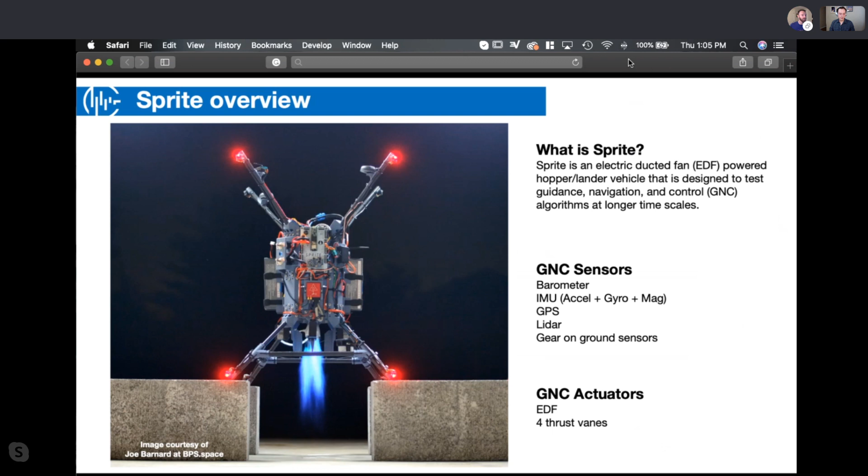And then there's sort of two main actuators. There's the EDF itself, which is the main fan in the center that's producing most of the thrust. And then there's 4 thrust vanes, which give you control over the roll, pitch, and yaw torques.

So I took this video from something you sent out on Twitter, which I think is pretty awesome, just to show what this is. There's the big fan, the EDF in the center. It's generating this column of air, producing all of that thrust, and then you are commanding these 4 thrust vanes in very specific ways in order to generate roll, pitch, and yaw torques.

Is there anything you want to add to this before we move on? The only thing would be the vane design is different now, but the concept is still the same. The two main actuators are just the fan—how fast are we spinning, how much force does it generate—and then the torques on the vehicle that can control all 3 axes, roll, pitch, and yaw, and that's just from those 4 vane directors at the bottom. So yeah, that's about it.

Okay, so going forward when we're talking about our control inputs, we're going to be talking specifically about these TVC vane positions. All right, let's move on here.

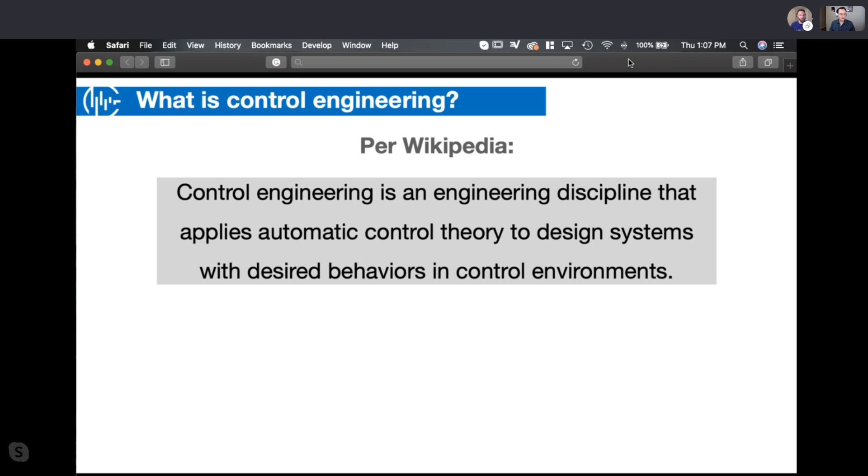So we're going to start at a really high level, and then hopefully hone in on something more specific. If you go to Wikipedia and ask what's control engineering, it says control engineering is an engineering discipline that applies automatic control theory to design systems with desired behaviors in control environments, which is just a mess of a sentence.

So the TLDR is that we're trying to get things to behave the way that we want them to behave. In most cases, we're talking about electromechanical systems—things like Sprite, like your car that you're trying to design a control system for, or a spacecraft, or your phone, or whatever. It's some combination of electronics and mechanisms and things like that.

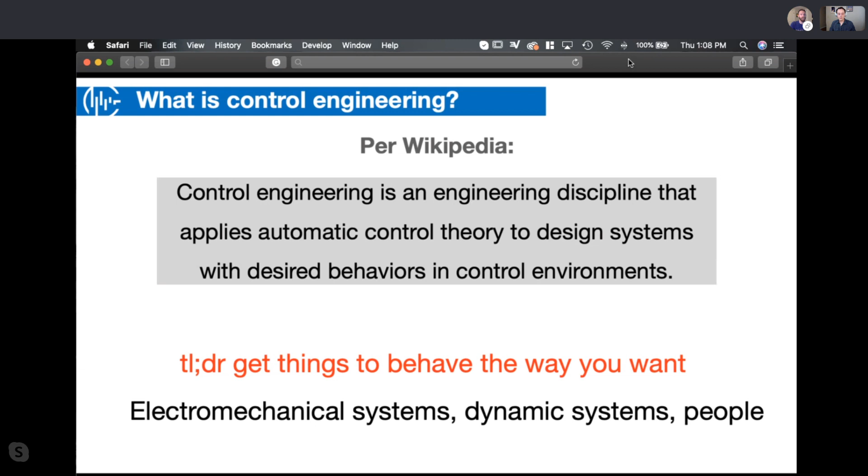But really, we can apply the theory we learn for controlling those types of systems to any kind of system that's governed by dynamic equations—dynamic systems like large-scale weather patterns, or even like you could adjust the interest rate to adjust the economy and inflation and stuff like that. Things that are just governed by these dynamic equations. And if you wanted to really stretch this analogy, you could talk about getting people to do what you want as a control problem, and we'll get into that in just a second here.

So the thing that all of those have in common, whether you're trying to control a dynamic system, an electromechanical system, or people, is that there's these 3 questions you're trying to ask throughout this process. The first is just trying to figure out what the current state of your system is—what's happening right now, what's the situation. What is Sprite doing? Is it hovering? Is it rolling? Is it tilted off to the side? Figuring that out. And then once you know that, you have to ask yourself, well, what do you want the state to be? What's the end goal, and what's a good outcome? Do I want Sprite to be in that state, or do I want it to be a little bit higher or a little bit straighter or something?

And then the third question is: okay, I know where it's at and I know where I want it to be. What's necessary to accomplish that goal? How do I get to the end goal? How do I poke and prod the system in very specific ways to make the state what I want it to be? So if you talk about controlling people, suppose you're in an argument with somebody, and you think, well, what do they believe? What do I want them to believe? And then how can I structure my arguments in a way that's going to change their mind? We can think about things like that in terms of controls.

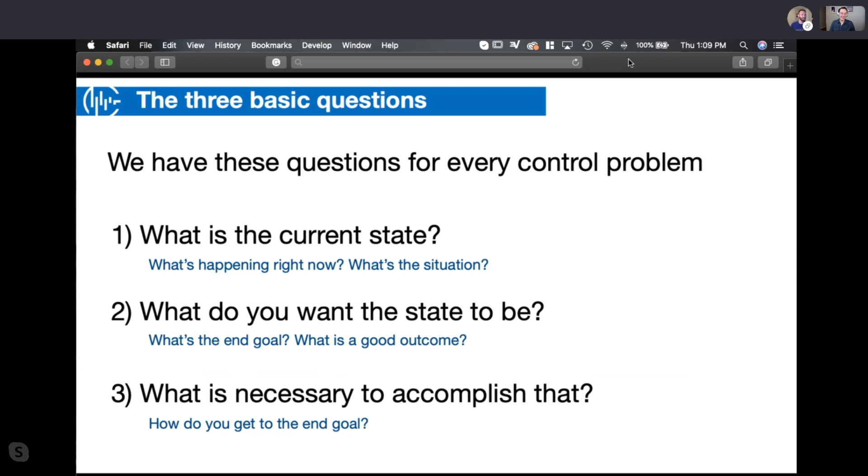This third question, by the way, is what I consider sort of the crux of the control problem, which is figuring out how to accomplish it.

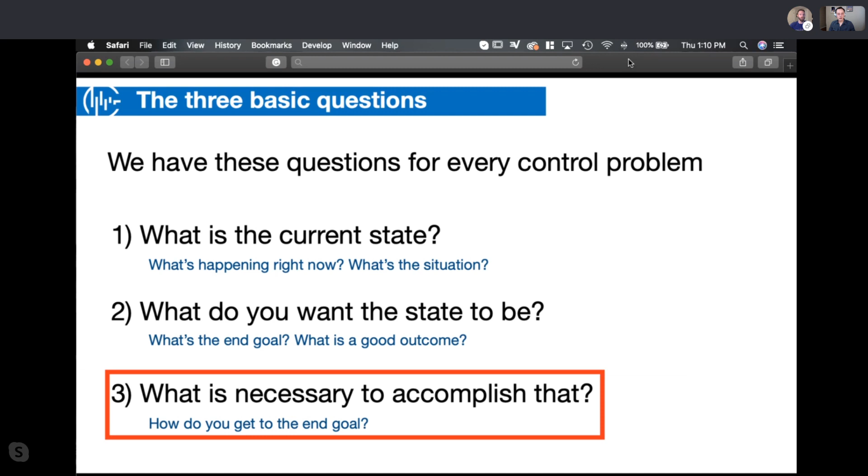We tend to think of autonomy as the very first thing, right? We want to get humans out of the loop. We want to build robots and drones and autonomous cars. And that's a perfectly legitimate reason to build a control system. But sometimes we do it to improve performance, like power steering assist on vehicles. That's not getting the human out of the loop, that's just improving their ability to steer the car.

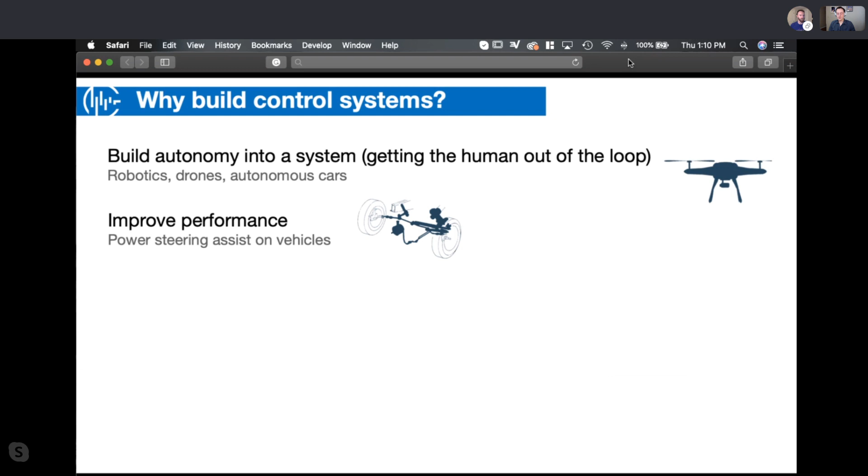We may do it to improve safety, improve stability. Some processes are inherently unstable, like nuclear power plants, and in order to get anything of value out of them, we have to build a control system around it to make them useful. And sometimes we're just doing it to reject disturbances, like a 3-axis camera gimbal, for example. These aren't all mutually exclusive, they're all interrelated. But it's one of the reasons why almost everything you interact with from a mechanical or electrical standpoint has some sort of control system involved in it, usually one of these 5 reasons.

So we're going to step back now. We understand the goal of control, so let's go all the way back to the beginning with an incomplete history lesson. I also want to preface that I'm not a historian, so the history might be a little bit fuzzy here, just take it with a grain of salt. The important thing is the story and the evolution of how we think about these problems.

A long time ago, the Greeks, specifically Ctesibius, developed what is regarded as the very first documented negative feedback controller. They were trying to figure out how to tell time with water clocks more accurately, and he came up with the float regulator, which is what we have in all of our toilets now for the most part. The simple concept is that if the water level in the tank is too low, the float goes down, water supply increases, raises it back up. Eventually you get to some perfect water level where the amount of water being supplied into the tank matches the water leaving the tank, and you now have a steady flow rate out of the bottom, which you can use to act as a timer. It's like a natural regulator.

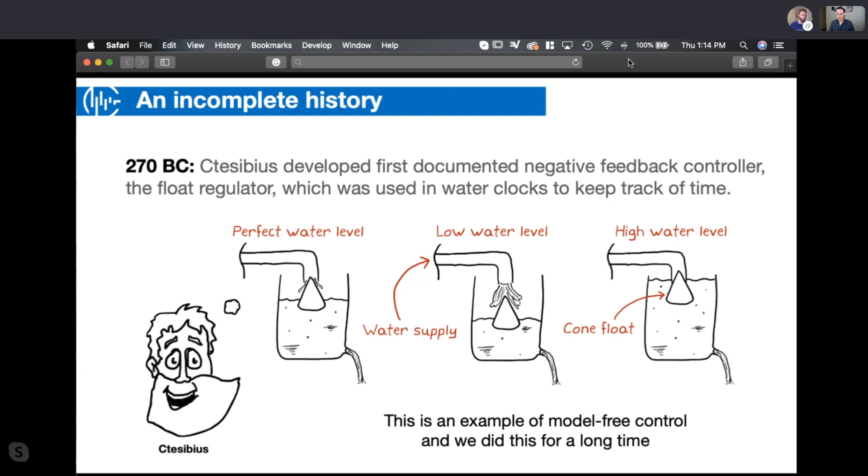So that's an example of model-free control. We have a choice now. Ctesibius didn't have that choice, not because he was lazy or anything, it's just the math hadn't been invented yet.

So we jump forward a number of years, and mathematics and calculus start taking off with Newton and Leibniz. They independently develop calculus, and then a whole bunch of people, including them, come along, like D'Alembert, Euler, Bernoulli, Lagrange, Fourier and others, and they start applying these differential equations that calculus gives us to dynamic systems, to help us predict how they're going to change over time.

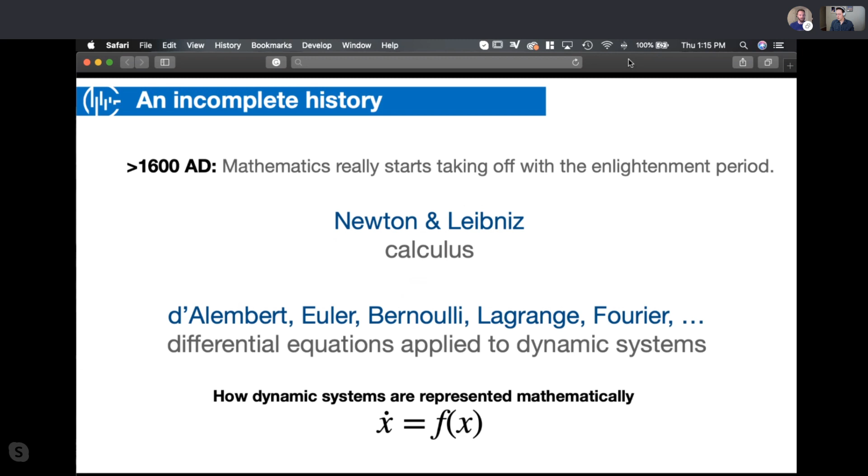And they loosely take the form of this equation, x dot equals f of x. The way we can interpret this is that if we have the current state of the system, which is x, and that could be a vector of things like position, velocity, roll angle, temperature, voltage, anything that helps describe the state of the system, it goes into what we call the state vector.

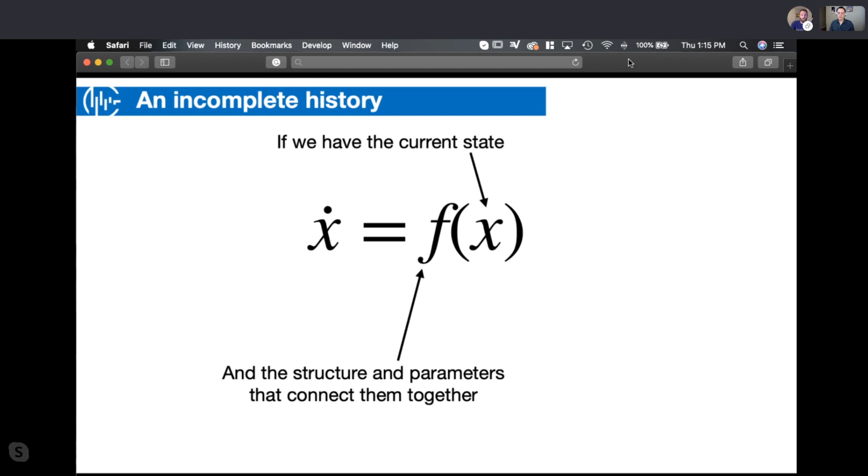So if we have the current state, and this is a big one, we know the structure and the parameters that connect all those states together, that function, then we can predict how the state's going to change over time. This x dot is the first derivative of x with respect to time, so it's how that state is changing as a function of the state itself. That's the baseline of dynamics right there.

But that would only be so good. We don't want to just wind up a spring system, let it go, walk away, and ask how's this thing going to react - which is all x dot equals f of x allows us to do. We also want to be able to add what I'm calling intentional external inputs into the system. We want to change the state of the system by adding energy into very specific points, which we'll call U from now on.

Unfortunately, U aren't the only external inputs that get into your system. There's also unintentional external inputs that we'll call disturbances. For Sprite, that would be wind gusts, temperature variations, and all the things that move the system that you haven't intentionally added yourself, like adjusting the EDF fan or the thrust vanes.

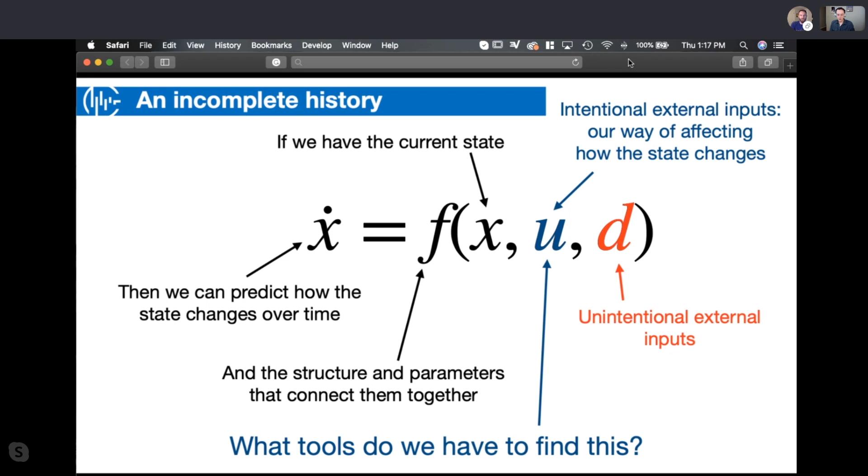So the question is, what tools do we have to figure out what U needs to be? We'll get to that in just a second, because I added this in since there were a few questions on the Discord. So this is kind of a rough chart.

What I wanted to show you here is that x dot equals f of x, u, d is like an abstracted version of what this model means. It's just some random function of x, u, and d. But there's a lot of different ways we can represent that function, and the method we choose depends on the system we're trying to model and what we're trying to do with it.

For example, we could just leave it as a differential equation, a time domain differential equation - that's a model of our system. If it's a linear system, we can break that high order differential equation up into a set of first order differential equations, which is state space representation, with the so-called A, B, C, and D matrices. These are just a different way to represent the dynamics of our system.

If it's a linear system and a single input, single output model, we could represent it as a transfer function. Same idea - we have some output, which is position, input is force, and we can write a transfer function that captures the dynamics of the system.

If we wanted to be really fancy about it, or if the dynamics are too difficult for us to write out directly, we may represent our system with a neural network and then use some form of machine learning to figure out what all the parameters need to be so that the input-output relationship matches real life - force goes in, position and velocity come out.

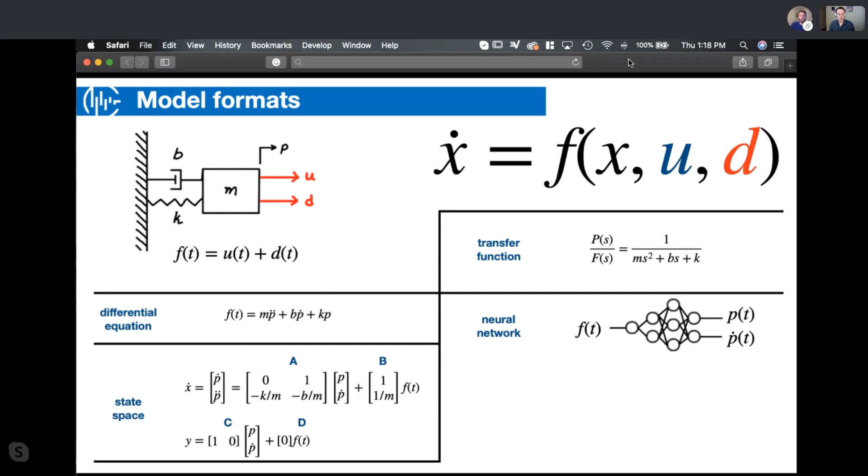And then we have a number of hybrid model formats. If our system is discrete and the transition from one discrete point to another is governed by probability, we might choose a Markov decision process to describe our system. Or a state machine, like for Sprite, you may have a model that governs how it behaves when it's on the ground, then switches to a takeoff state, then a hover state, then a land state. So all of that can be built into a model.

So the thing here is when we're talking about a model, we're not talking about state space or transfer function or hybrid. We're talking about all of this stuff. We're just talking about a mathematical representation of the system.

I just want to add real quick, especially if you don't have a background in it, all these equations and fancy italic letters can look a little scary. But it's just an attempt at mathematically representing what's going on. The neural network is, funnily enough, kind of a friendly intro to it. You're just trying to describe how the system works, and there's a bunch of different ways you can take to do that. There's seriously no one approach.

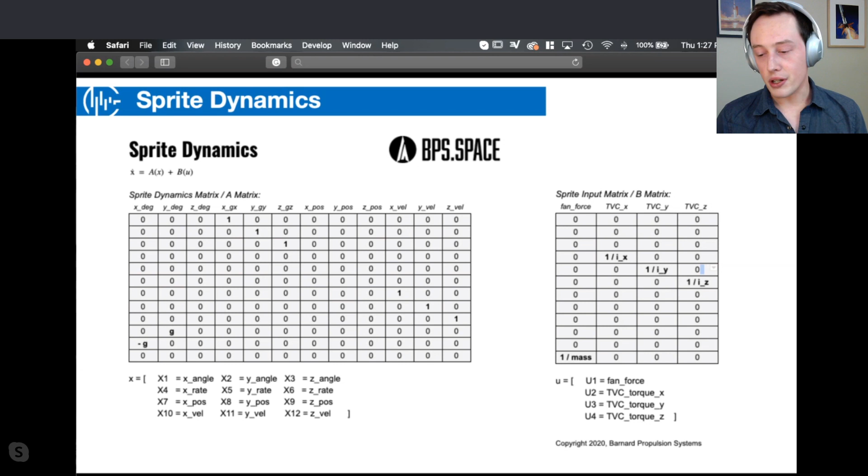That's the thing that has helped me a lot in designing Sprite, is how close it really is to a drone or a UAV. I actually got a lot of the idea for how to build these matrices from a couple different papers that went through how they had written out the state space matrices for their quadcopters. There's a decent amount of resources online that you can derive these from without having to write every single thing from the ground up, or you can just use those as a jumping off point.

So here's what's awesome, Joe is in a much better position than Ctesibius was, because he now has a model of his system. Control theory provides tools necessary to analyze dynamic systems and then determine what the right inputs need to be. That's what control theory gives us.

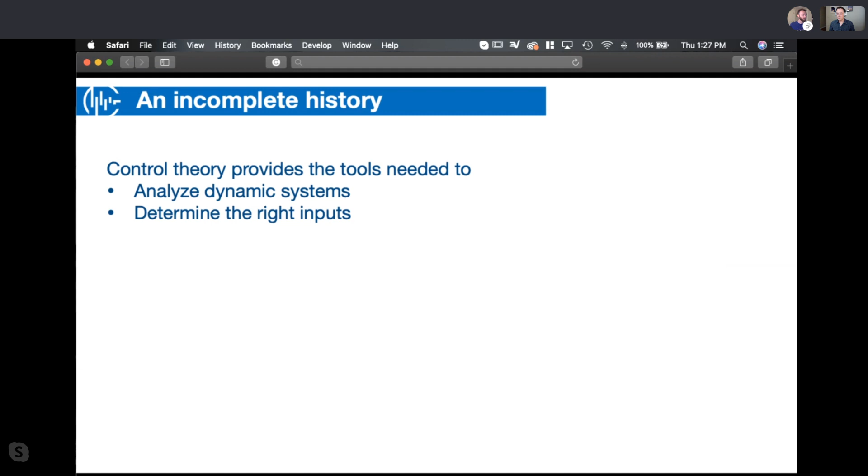It sort of deviated from mathematics in the mid-1800s with James Clerk Maxwell. He was trying to describe this instability in these flyball governors and decided that the existing mathematics wasn't good enough. So he developed some additional tools and techniques, wrote it down, and then boom, control theory has its own field. It began, and it's flourished ever since.

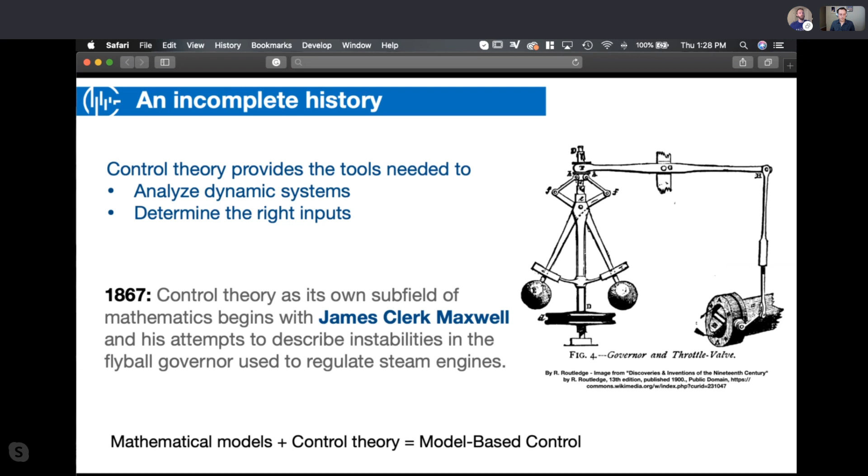What's awesome is that once you have a mathematical model of your system and you have a little bit of grasp of control theory, you can now approach your system with model-based control rather than model-free control. So it gives you a lot more options that you didn't have before.

So there's a diagram that we're going to build up over time here, and hopefully this will all make sense. But just to describe all of control engineering here, we have some dynamic system, and there's two inputs, U and D, and there's the output, which is the states.

Just to bring this back to Sprite, U in this case we're going to talk about thrust vanes, because I'm always just going to talk about roll and not complicate things too much. Thrust vane commands go into this system, Sprite gets affected in some way, and then roll angle and roll rate changes, as well as other things. But we're going to look at the roll.

And then it turns out that the disturbance, other things are causing the vehicle to roll. There's environmental influences, and then there's internal influences also, like the EDF itself produces a torque, and that torque changes the state of the system. And now you're going to have to change the thrust vanes to handle that if you want to keep the roll angle constant, right?

All right, so the question is, where do we go from here? It's a good question. All right.

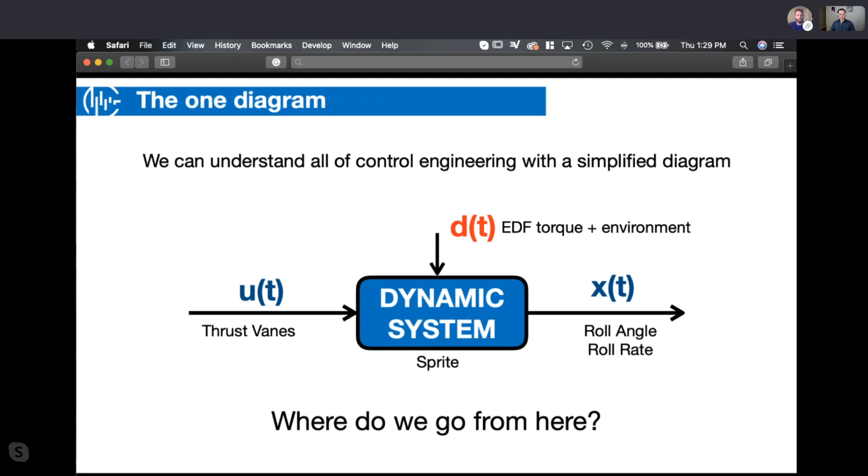So here's where we're at so far. We don't know what the system is. Joe doesn't understand what he's working with just yet. He needs to describe it mathematically. He needs to build those state space equations. Or if you don't want to do that, you still need to understand at some level how the inputs affect the system state. And you need to know what disturbances are going to act on your system and what is the operating environment. You have to kind of understand all of this stuff before you can even really begin.

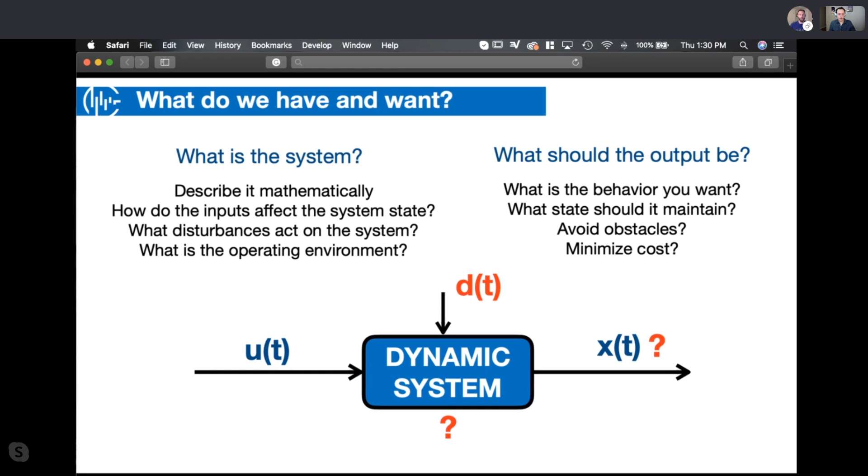Then the question is, what should the output be? And this kind of seems a little bit silly, but it's not as straightforward as you might think. You might say, well, I just don't want the vehicle to roll. But should it avoid obstacles in the process? Are you trying to minimize some kind of cost, like how much effort it takes you to hold roll constant? What is the actual behavior that you're looking for? So there's questions around there.

Just to give a quick example of this, for the cost thing, there's a very real example, especially regarding rockets. There are a lot of actual launch vehicles that use open loop hydraulic systems to control their actuators, which means there's a finite amount - I think this is now less popular than it used to be, but in some systems you have a finite amount of control inputs that you can make before you just run out. Or maybe I really want to minimize how much energy my servos are pulling from that battery.

Yeah, Robert Cook just put it in the chat - Delta II has an open loop hydraulic control system. There's a bunch of rockets that's actually failed because of that. But that can be really important depending on how your system is designed, the cost of your actuators. Anyway, just wanted to interject.

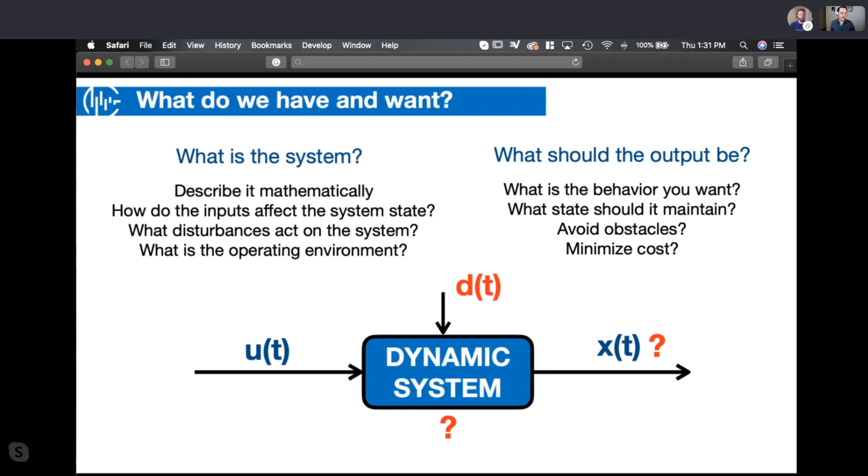Yeah, great. And then there's what I was referring to earlier, which is the main question, which is how do we get this system to generate the output we want? And there's two ways that we can do that. We have control over the inputs, right? Joe can move the thrust vanes, Joe can move the EDF throttle, but we also have control over the system dynamics. You don't always have to solve your problem with a control system. Sometimes your problem needs to be solved by going in there and actually physically changing the system. And that's a perfectly acceptable way of getting it to behave the way that you want it to behave.

All right, so we have a whole bunch of tools and they go by different names. When we're talking about what is the system, you might look into system identification, which is building a model of your system using data. Or you might talk about modeling, like first principles modeling, where you're building a model of your system by understanding the physics and writing out the physical equations directly. Or you might do analysis on a model or on the system to see what you've got. So these are the types of names that we refer to when we're looking up how to answer this question.

What is the system? And then what should the output be is the planning problem. And then how do we get that output is both the control problem, which is figuring out what U is, and the design problem, which is maybe even changing the dynamic system completely at the mechanical level or the physical level, because that's the only way for us to get the behavior that we want.

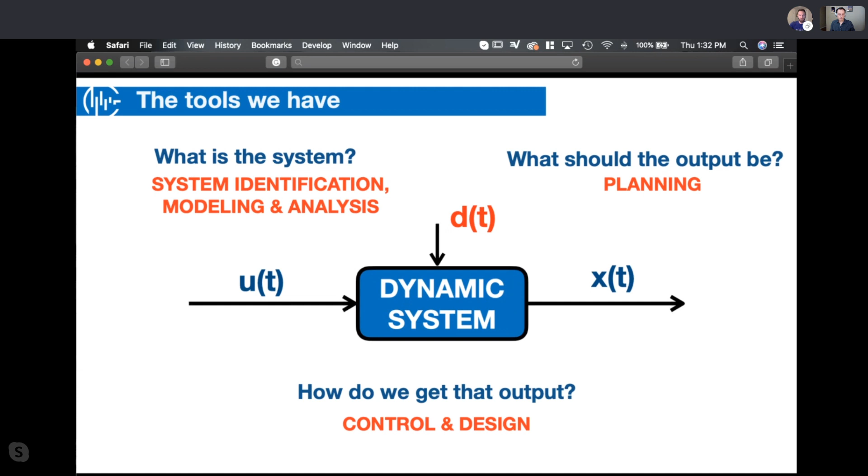All right, so the first question we might ask ourselves is, well, can we determine U without knowing X? This is what's referred to as feed forward.

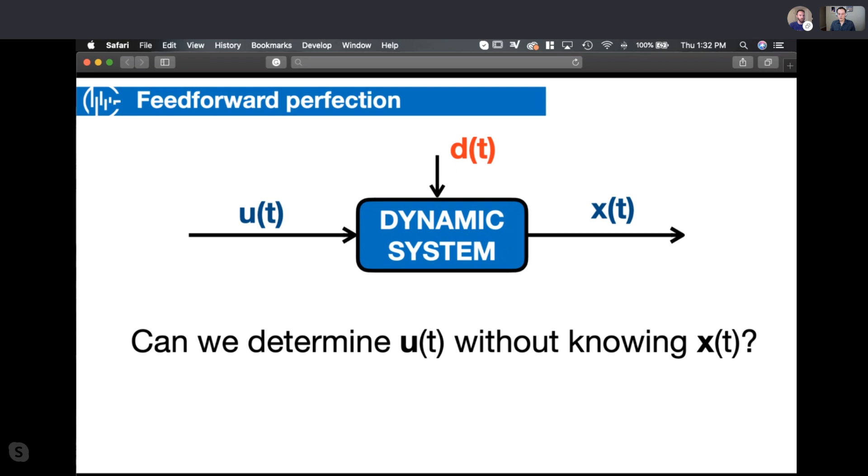So in other words, I don't know, can you see my mouse, by the way? Yeah, it's actually really helpful.

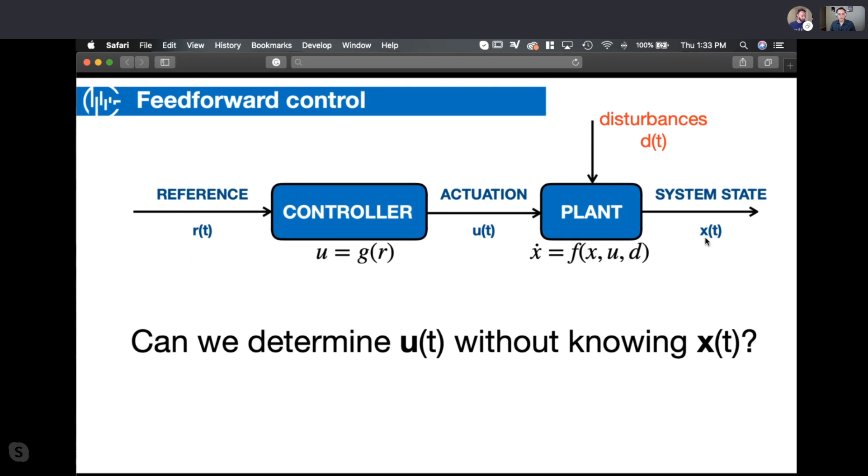Okay, good. So this, which I'm calling reference, what you might hear as a set point or the command, is the thing that you want the system to do. So can you develop a system where, based on what you want it to do, you build some function that's just a function of the set point, move the actuators to the correct positions, and get the system state output you're looking for, without even knowing the system state whatsoever? So can we build this function, g of r, so that x of t equals our set point?

And the answer is yes, we absolutely can, if the system has predictable behavior, is robust to disturbances, and has relatively relaxed requirements.

A classic example is the dishwasher. It's an open loop control system, right? The end goal, the system state we're looking for, is clean dishes, but we don't have any kind of monitor inside the dishwasher that's checking how clean the dish is and then stopping it whenever it's perfectly clean. At least mine doesn't, I'm sure there are some out there that do.

What I do is I just set a runtime and let it go. If the dishes are clean halfway through, not a big deal, it has relaxed requirements. If they're dirty when it's done, not a big deal, I'll just send them through again. And no matter how dirty or disturbed the dishes are, it's still going to run perfectly fine, right?

So this is a good example of why you would use feed-forward control versus building some sort of fancy feedback controller. To bring it back to Sprite, Joe, you have at least one feed-forward controller that I know of. I don't really know your system all that well, I just lurk on Twitter and Discord and figure out all this stuff.

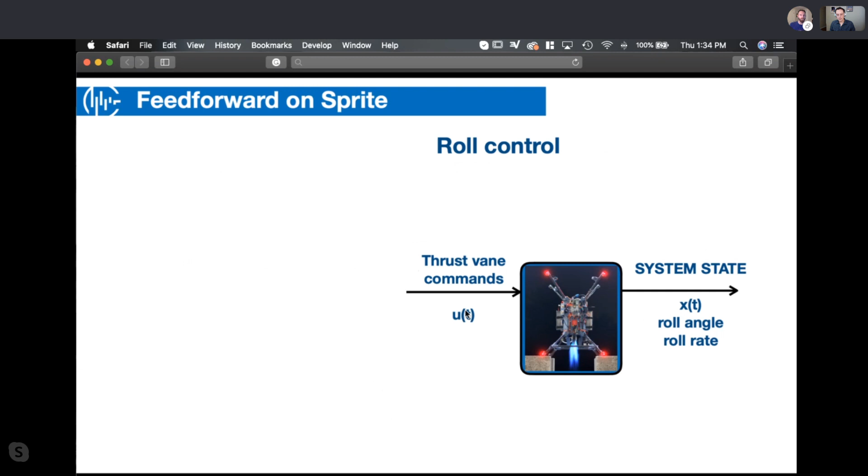But I'm going to do a poor job of explaining this, and then I'll throw it over to you to discuss more. So let's say we're talking about roll control, and we're trying to maintain a fixed roll angle, which means a roll rate of 0. The way we can command that is by moving those four thrust vanes. But here's the thing: we're lowering or increasing in altitude, so the throttle of the EDF is being adjusted, or even at any particular fixed speed, because it's moving air around, that's causing a roll torque to get into the system and move Sprite, starting to roll, which is not ideal.

So here's something Joe could do. He could ask himself this question, or make this statement: when the EDF throttle changes, I'm going to compensate for that torque by moving the thrust vanes a predetermined amount. I'm going to be smart about this and calculate exactly how much I need to move the thrust vanes at a fixed EDF RPM, or whenever I accelerate or decelerate the EDF. And if I predict this ahead of time correctly, while the EDF is spinning up, I could be real-time moving the thrust vanes such that the system doesn't roll at all.

It's perfectly compensated for. And that way, you don't actually have to know whether that's true or not, you don't have to measure roll, because you've done all your research and were really smart about it, and figured out what this feed-forward controller should be. So I believe, Joe, that you are doing some form of this. Is that a true statement?

I will drop in and say that yes, it is, and it's actually one of the... so there are a bunch of benefits to this. I've actually seen, Ryan, you have a couple of videos where you talk about the benefits of adding feed-forward control where you can, to just try and... the thing about it is, I could leave all of this to a feedback controller.

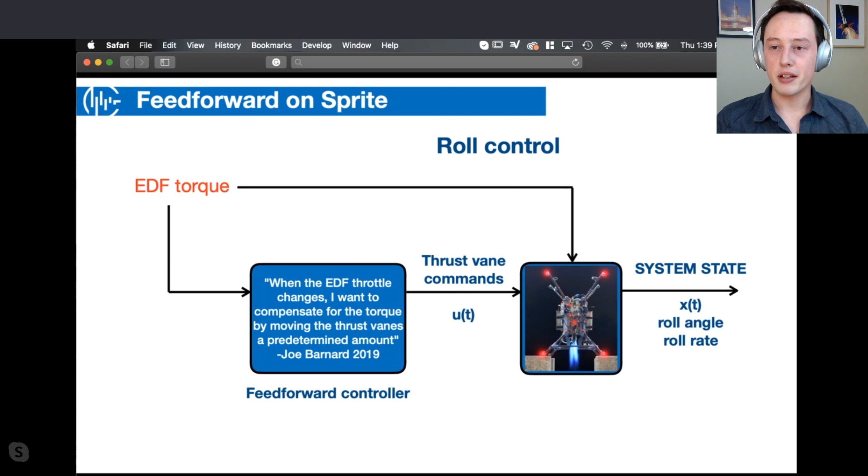So hopefully this makes sense, but the advantages of feed forward are pretty great here, especially for the roll. That's probably the easiest way to think about it. When you spin that fan, you're going to need some counter torque, and you can just do that before you even measure any error.

Yeah, great. I think that every single time I finish a slide, hopefully this all makes sense. All right, moving on. Yeah, and if it doesn't, we'll see what everybody thinks in the question and answer period here later. But it also, if it doesn't make sense, just let us know.

Yeah, so feed forward is an approach to control. It's a perfectly valid approach. It gets used all the time. And like Joe said, sometimes it gets used in conjunction with feedback.

So the reason why feedback control is here, negative feedback control, is that it's just too hard to predict everything, right? Disturbances especially, stochastic noise, and just all sorts of uncertainty in our system. So prediction goes out the window for really complex systems.

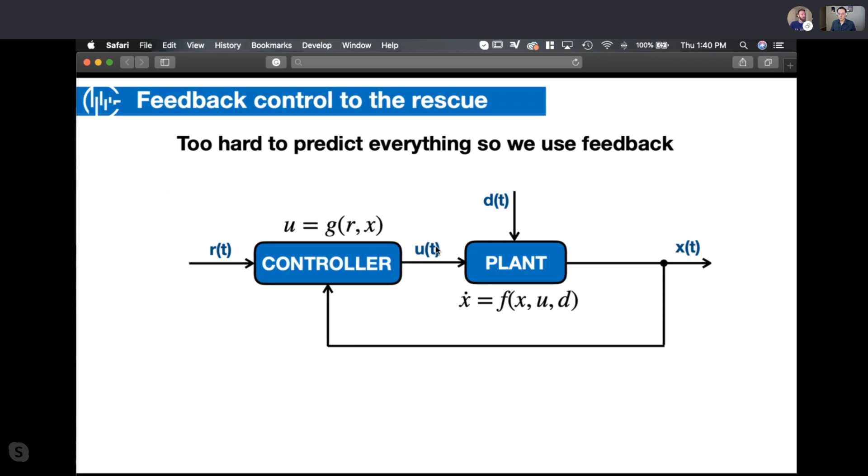So we use feedback, and feedback just basically means that the actuator commands, this U of T, the thrust vane commands, in some way depend on the current state of the system. Whatever the state of the system is, that gets fed back into this controller now, which is just a function of both the set point, the reference, and the state in some way. And there's a ton of ways to do feedback, but they all come back to this one point: the input in some way depends on the output.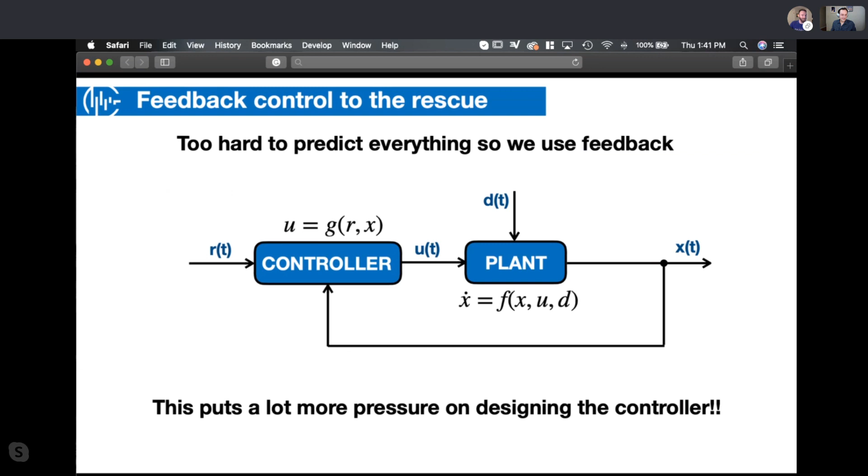This puts a lot more pressure on designing the controller, right? You can really screw up. You can screw up more, I feel like, with a feedback controller than you can with a feed-forward controller.

Here's the quick explanation of why that is the case. Remember our plant, which is the name for the system you're trying to control. You might call it a process. There's small nomenclature differences between plant, process, and system, but for our purpose here, the plant is Sprite. So the original Sprite dynamics are x dot as a function of x, u, d, right?

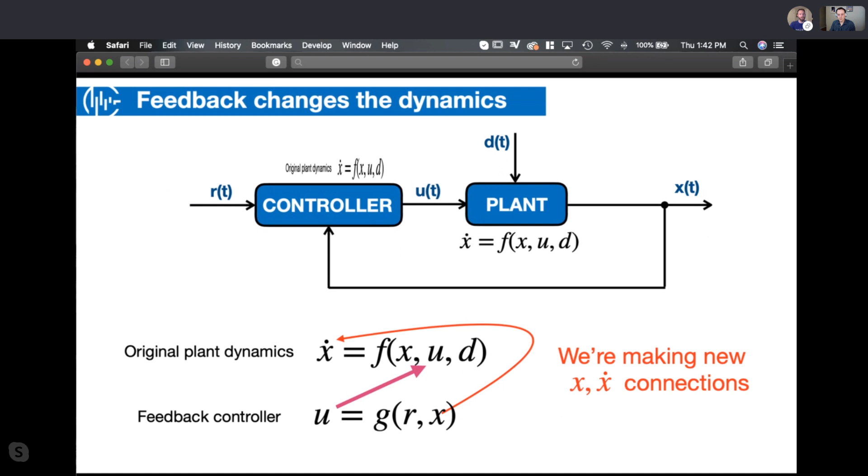Now we're claiming that u of t is also a function of the reference and x. So when we feed u of t back, and it comes into the plant, we're making new connections between the state of the system and how the system changes. Remember, x dot equals f of x is the dynamics. So by doing a feedback controller, we are artificially changing the dynamics of our system. And when you do that, you can affect important things like stability, performance, and the way this thing fundamentally behaves. So that's why we have to put a little more care into developing a feedback controller than a feed-forward only. So the question is, how do we design this function?

Joe, how did you design your controller? We'll get there in a second. Yeah.

There's a million ways, right? And you talk to anybody and they're just like, oh, I did all of this stuff and it was super confusing. But hopefully we'll try to simplify this. When you're developing a controller, you have two choices you need to make: you need to choose a structure for that controller, and then you need to choose the parameters to populate that structure with. In some cases, we call choosing the parameters tuning, but not in all cases.

One of the more popular structures is PID: proportional, integral, and derivative, and it acts on the system error, which is the reference minus the current state. So that's the structure. And then when we want to choose the parameters, we're trying to choose the proportional, integral, or derivative term. We have three terms there. We may do it heuristically with trial and error, guesses, and experience, or systematically with a model of our system.

Another approach could be full state feedback. Basically, Joe has 12 states in his system. Every single one of those states gets fed back, and every single one gets multiplied by its own gain, and the whole thing gets summed together. So now instead of 3 parameters, you have 1 parameter for every single state, and Joe has 12, for example.

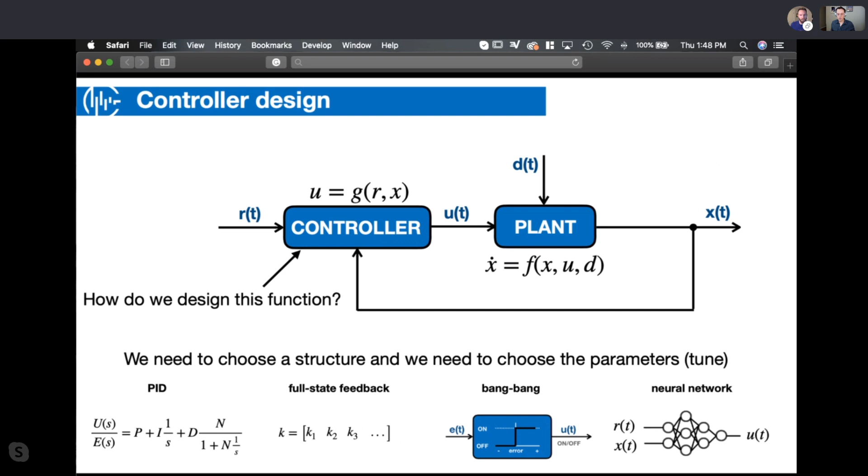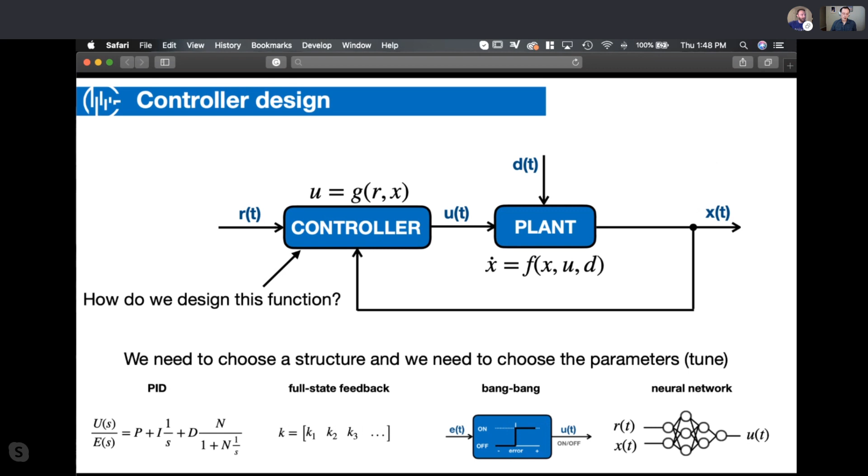And then the output is the commands that you want to send to your actuators. The process of tuning a neural network would be some sort of machine learning algorithm to estimate what those weights and biases need to be. There's a whole bunch more. I didn't list all of them here, but I just wanted to give you a feel for the fact that you choose a structure and then figure out how to tune it. Structures and tuning mechanisms are different things.

Usually when I give this talk, I'm trying to make a case for model-based design because people say they don't want to build a model. So that's why this is here. Especially for full state feedback, you almost require a model in order to do that correctly. So we have to build a model of our system for some of these.

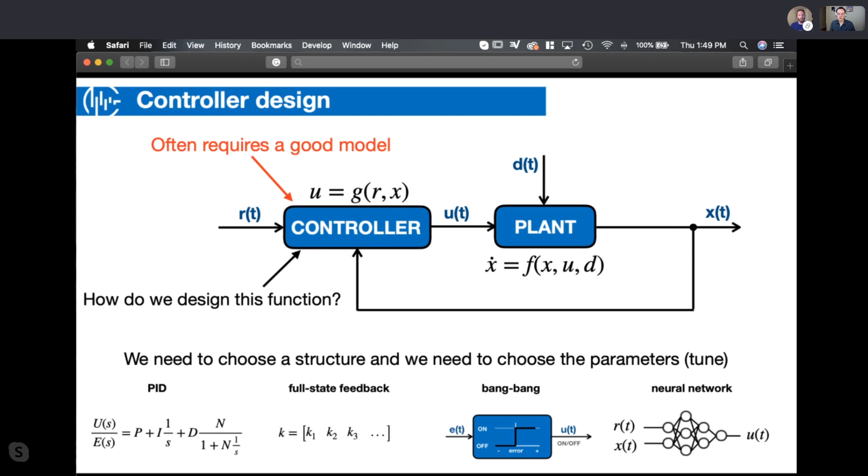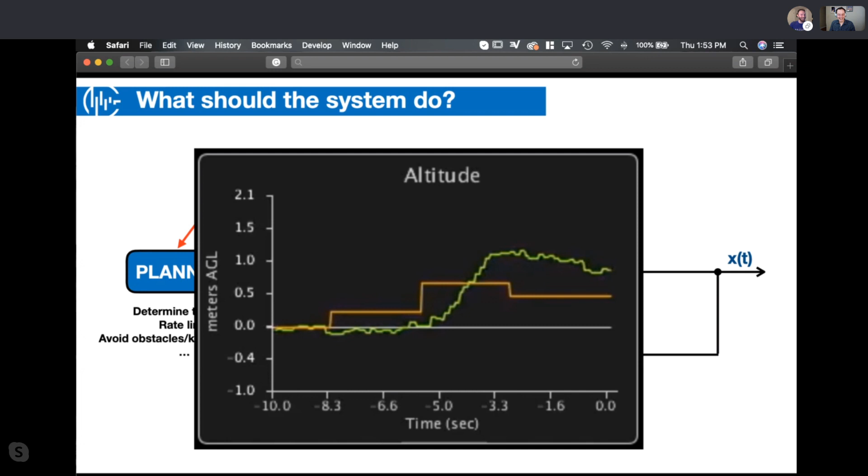It's much better now, I've seen it since I took this screenshot. So at some point you said, hey, I got this update here. Primarily, I got the path planning function done, which draws out divert and larger maneuvers. I wrote a little program that looks at the magnetometer and GPS to get a compass heading at liftoff, which tells the craft how to use NED coordinates to guide itself in the right reference frame.

So this is how path planning sort of evolves. You're testing with these step responses, and nobody wants their vehicle to just step up and down, you want it to do something. A lot of what looks like autonomy and smarts in the system is not actually the controller. What looks like smarts is the ability of some higher level function to tell it what to do, and then the controller follows it. Figuring out how to develop a path you want Sprite to follow is a lot of work, and it's part of the overall control design.

Yeah, I'd love to talk more about this too. The path planning stuff is really important, and the more I've gotten into guidance and control systems and control systems in general, I've realized how important this is.

When you build that linear state space model, you're building it around a point. It's what you'll see referenced as linearizing around a point. So my model for Sprite is a representation of how Sprite behaves. It's a pretty good estimation of how Sprite behaves when it's completely upright with no disturbances, but that's not always where the craft is going to be.

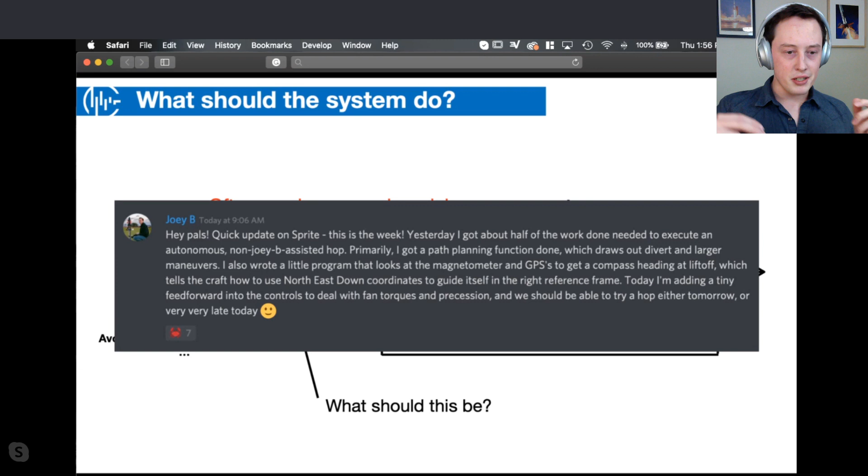And that overshoot is going to grow. Like if I commanded it to go all the way over to 45 degrees, it's really going to overshoot that, and it might kick itself to be unstable through that. So using path planning, it almost feels like giving your control system training wheels, so that you can see how it's going to perform within a really close measurement of those set points or those references.

And so path planning, or developing a way to tell the craft how to acceptably move from one point to another, or avoid an obstacle or something like that. As long as you can track that reference and as long as that reference isn't out of agreement with how the system works. Does this make sense? I hope this makes sense.

That's been pretty important. I did end up getting the path planning working. So instead of those steps, which jolt the vehicle and give it this big oscillation in altitude - anyone in the Discord will have seen the test I did yesterday, where it's just going up and down the whole time - a path planning routine is going to really gently guide it up so that it can easily track that reference. Anyway, that's my little path planning spiel.

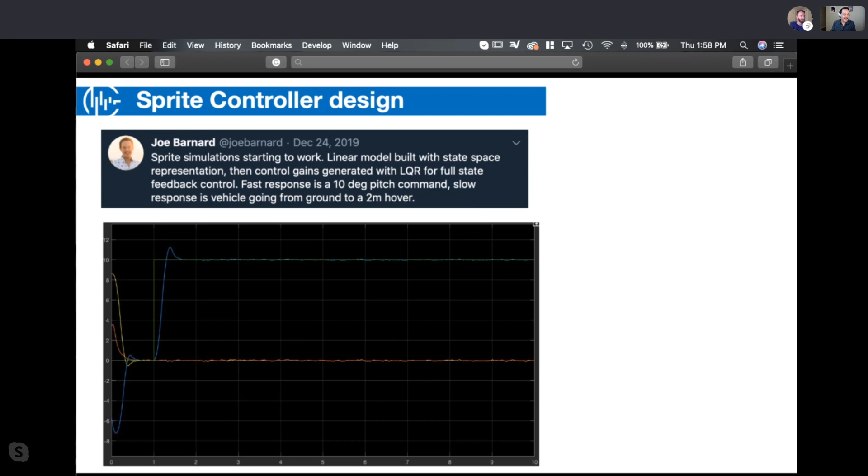There's a question there, how long this stream will be. I don't know. I was anticipating that you and I were going to talk for about an hour and a half and then maybe however many questions people have. I can stick around for a while there, but I suspect about 30 more minutes of us droning on, and then some questions. All right.

So the problem here that we've found ourselves in with feedback control is that I've just made this bold statement that we're feeding back the states of the system, right? But we never know the true state of the system. So we've introduced a new problem here, and that's the fact that the true state of the system gets measured, and that measurement has noise and other errors associated with it. And so what we're getting is the output.

We're measuring very few specific things, maybe not the state directly - maybe it's something that we can infer the state from. Like we may not measure velocity, but if we're measuring position over time, we can infer velocity, for example. And that's noisy. So we have the output Y that's what we're getting out of our system, and that has to go through some sort of state estimator. That state estimator could be as simple as send it straight through, that measurement is good enough, or it may be send it through a low pass filter to knock off some of that high frequency noise. And it could be something even more complicated where it requires a good model, which is like an observer, like a Kalman filter. And I'll get into that in just a second.

But the bottom line is what comes out of this state estimation block is an estimated state, this X hat. So we never quite know the true state of the system. We have to measure it, and then figure that out. Developing this state estimation is another part of the control problem.

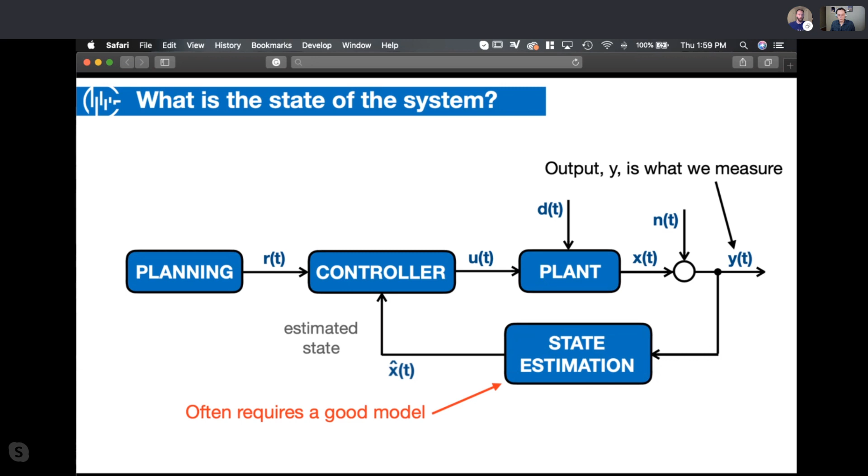Another tweet from last year says it's a little jank, but with how accurate the LiDAR and barometric pressure reading is and GPS, when they're all Kalmaned together... The thing I wanted to point out is that Joe's doing state estimation, at least in this instance, with a Kalman filter, blending together the measurements from the LiDAR, the barometer, and the GPS.

So this may help folks, maybe not. I don't know, maybe it'll just confuse you. But this is my 1-minute introduction to a Kalman filter.

How do we know state? How do we know something as people? How do we know how fast we're driving? How do we know the voltage of something? How do we know what time it is? It's that we have these sensors that allow us to measure the state - a speedometer, a voltmeter, a watch, something like that.

But we're not totally clueless people. We don't have to continuously look at our speedometer to know how fast we're going, or continuously look at our watch to know what time it is. We have this ability to predict. We have a model in our head of the world, and we can use that to figure things out. So if I look at my watch and it says 2:01, I can say pretty confidently that it's now not 3 o'clock, even though I've stopped looking at my watch.

So we have these two ways to determine state: a prediction and a measurement. When we're talking about systems like Sprite, both of these are inherently flawed. Your measurement is noisy, your measurement is flawed. Your prediction, that state space representation of your system, is flawed. But rather than relying on a measurement alone or our ability to predict alone, a Kalman filter combines those two things together to get a better representation of the overall system.

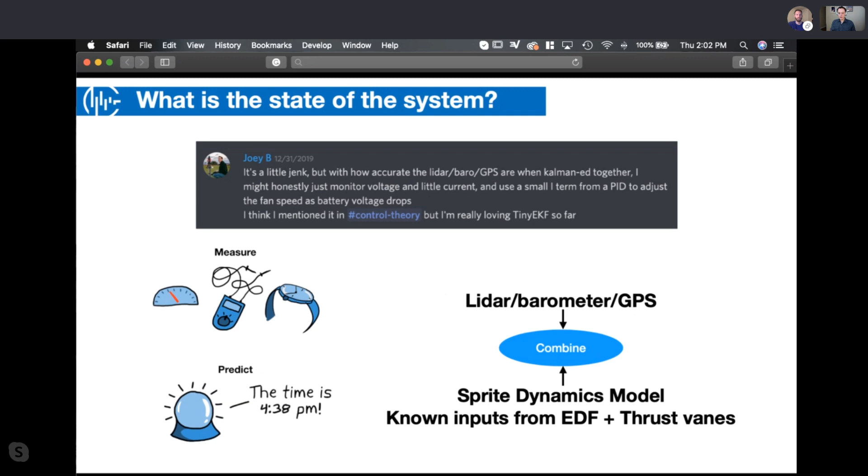All right, so we've got our planning algorithm, we have our controller, we've developed a model of our plant, now we have our state estimator. The last step - well, it's not the last step because you're doing this continuously - but the last step in this presentation is we have to simulate it, analyze it, test it, and know what we ended up with.

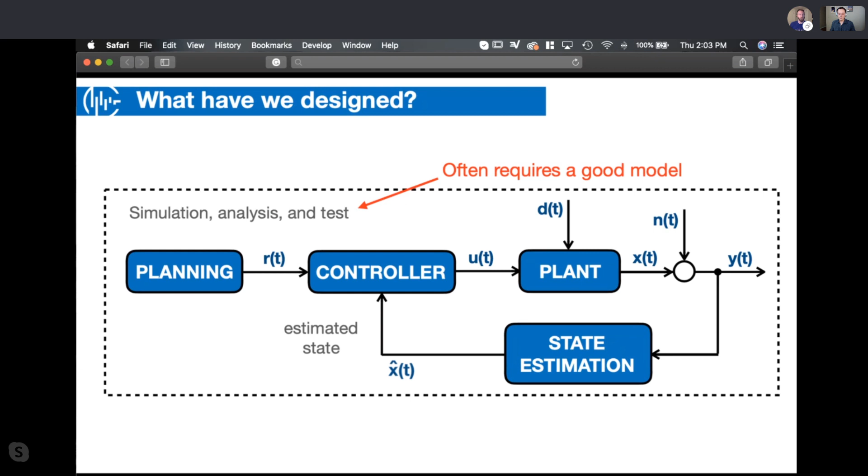When Joe wants to know whether Sprite's actually going to work or not - and again, not always, there's a lot of physical testing and stuff - but sometimes, and often, analysis and certainly simulation and tests require a good model of our system. So modeling is prevalent throughout all of this stuff, and Joe's done a ton of modeling. Let's see if this is going to work.

And then you're doing a lot of what I'd consider model verification, where you update your model with values from testing. So you built the Sprite dynamic simulation in MATLAB, took a gut feeling guess at roll pitch yaw moments of inertia, got some numbers, then measured them tonight in prep for the first hop and got slightly different numbers. So you probably went in and updated your model, and maybe retuned the controller.

It's looking at when I command a deflection - this is a really tiny thing, but it affects the model a lot. These things control a whole lot of states, so I want a really good measurement. I used a high-speed camera here to get a good measurement of the time difference between when I command an angle, let's say 10 degrees on the vane shown there, and when it actually hits that angle.

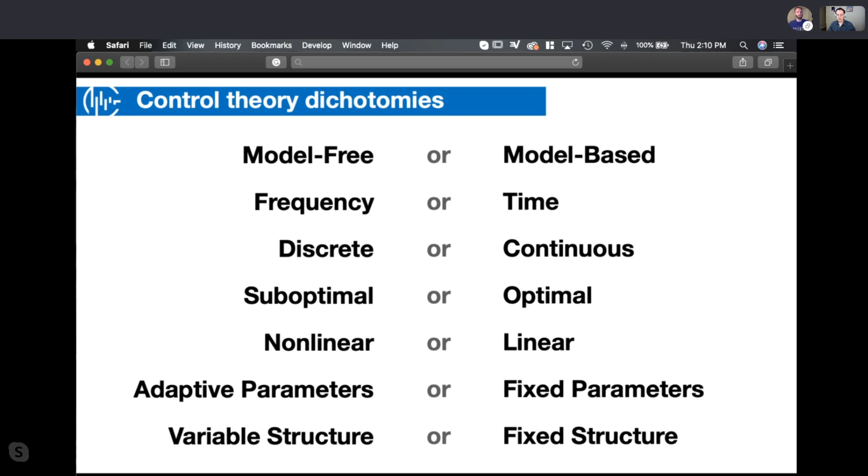And you can also vary the structure itself. This is especially true in like neural networks, right? The structure's baked into the network itself, and that kind of morphs and changes as well as the parameters. So these are just some of the things we need to consider when you're approaching your system.

So Joe, I'll leave this up to you here. I can blitz through this map of control. This is the last bit that I have here. If you think that's a good thing to do, or should we pause for a second and see if anybody has anything burning that they want to ask?

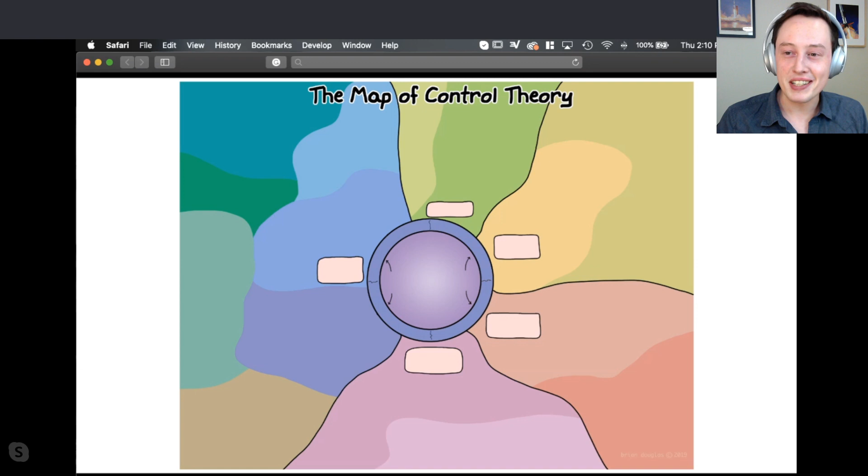I would say let's go through it real quick. I think it's really fun to look at it all because there's a sort of nice message at the end about how you don't need to learn all of these things. But yeah, before we go into this, just know you don't need to learn all of these things to do controls engineering. But let's take a look.

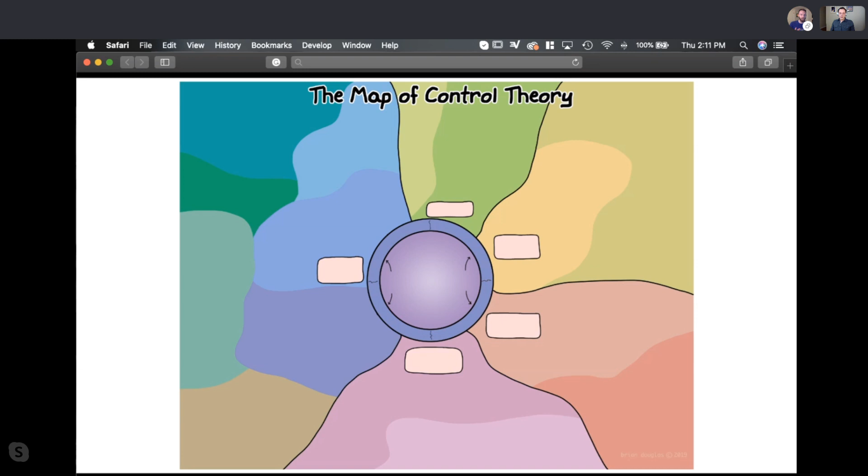And I saw you made this the thumbnail, which is pretty cool. And if you've spent some time looking at it, also know that this isn't complete. I just wanted to give people an idea of the types of things that fit into these buckets here.

So in the center, there's the float regulator, which kind of kicked it off. We got feedback control and feed forward control, and then some of the more popular domains you might be working in, continuous or discrete, and you get back and forth between those with various discrete-to-continuous transforms, and there's a bunch of them in there.

You might work in the time domain or frequency domain. You get back and forth between those with Laplace or Fourier, if you're an electrical engineer, I suppose. I always like to think in Laplace.

And then around the outside is the 5 families of things that we need to learn. On the modeling and simulation side, the interior of this is the way that we choose to represent our mathematical model: transfer functions, linear state space, or maybe nonlinear state space. And then all of the hybrid systems with Markov decision processes and state machines and all of that kind of stuff. There's a whole bunch of stuff in here, but this is about how you want to represent your mathematical model of your system.

The outer portion of this is some things that go along with that mathematical representation. You may want to simulate it, which has a whole slew of problems, like what sample time, what integration method, how am I going to log all the data, and all of that stuff that goes into simulation. How am I going to display it all? System ID, again, is a way to develop a model using data instead of using first-principle physics.

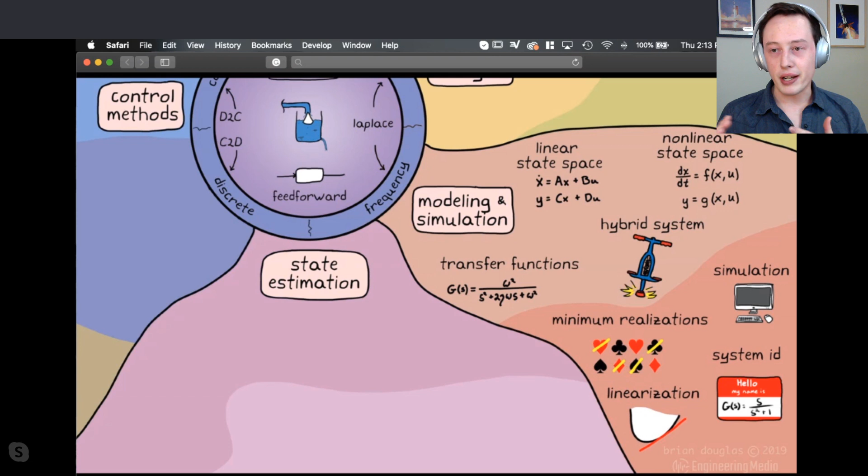Up on the system analysis side of things, the interior here are the types of things we're concerned with when we're approaching a control system. These are things like: how does it perform? Is it stable? Do I have enough margin in the design? Is it controllable or observable? This basically means, do I have the right actuators in the right place that I can control all of the states, and do I have the right sensors in the right place that I can measure everything?

And then sometimes we give our systems fancy names like non-minimum phase, or transfer order type, or order number, or something like that. Mostly that's just to help us realize the type of system we're dealing with. Non-minimum phase, I'm not going to get into it too much—I have a video on it if you want to watch it.

Then the outer portion of this is the tools we have to help us figure this stuff out. The Gang of Six—actually I just made a video on this too—is the types of transfer functions we may look at to assess things like performance and stability. If it's a nonlinear system, we may look at Lyapunov stability. We like to break things up into block diagrams. We may look at Bode plots, Nichols charts, phase plane charts, and all of these different charts—there's charts and charts and charts. And all of these things just help us figure out certain things about our system.

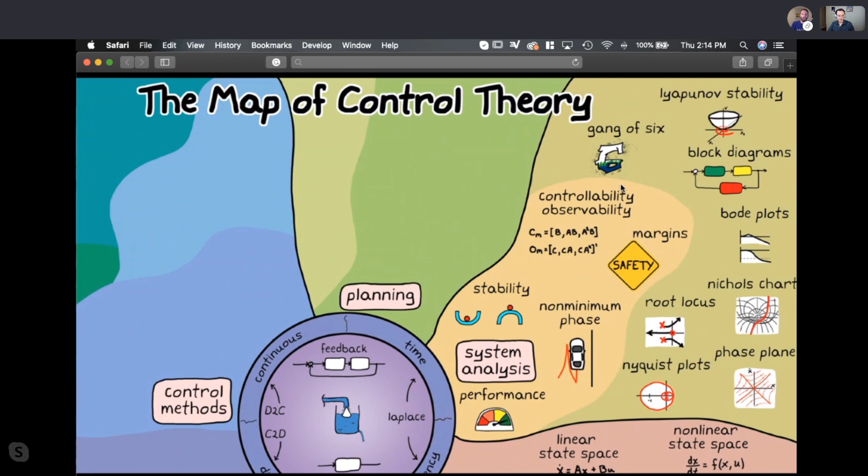On the planning side of things, the left is the building blocks, as I talked about. We have impulse response, step response, and sine input. It's not necessarily that we're going to command the vehicle like that, but it helps us learn how the system is going to behave, so that when we actually build the path planning, we know it's going to behave the way that we want.

And part of that is developing a map of the landmarks of the environment you're going to operate within, avoiding constraints and obstacles, and maybe solving an optimal path through obstacles.

And then there's this idea of holonomic and non-holonomic and redundant, which is basically a comparison of how many controllable degrees of freedom you have versus how many degrees of freedom your system has. So, for example, a car can go forwards and backwards, and it can move a steering wheel left and right, which is only like 2. But yet you can go forward and backward, and you can turn the car all the way around, and you can go in every which way in every direction.

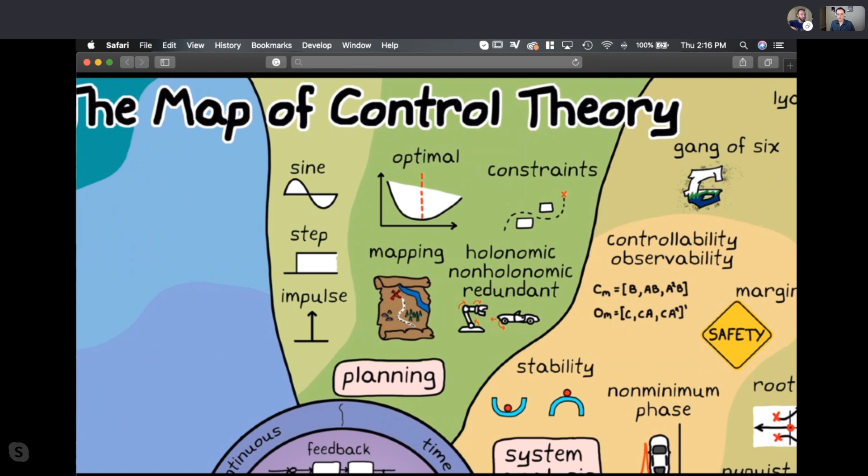That's kind of a system you're going to develop a different plan for, versus a robotic arm that might have dozens of degrees of freedom, and you can pick up that object from several different actuator positions. So you've got to figure out that plan also.

Down on state estimation, you may do something as simple as just calibration. You may remove bias out of a sensor. You may rotate that sensor into a new coordinate frame. You may filter the sensor with a notch filter or a low pass filter or something to get rid of noise. You may blend that sensor with other sensors and models of your system to fuse them together to get a better estimate of state.

And if the state you're trying to estimate is not yours, but something else, that just becomes the tracking problem—state estimation for something remote and not myself.

And then one of the more popular ones is just this idea of the observer, which we've gotten into already, which is kind of combining models of your system and measurements to get a better estimate overall. And like the Kalman filters and the extended Kalman filter, clearly the most popular ones, but they're kind of the heart of sensor fusion also.

So there's a lot of overlap here in all of these terms. And depending on how nonlinear your system is and how much compute processing power you have, you may upgrade your Kalman filter to a sigma point filter or a particle filter.

So things to think about.

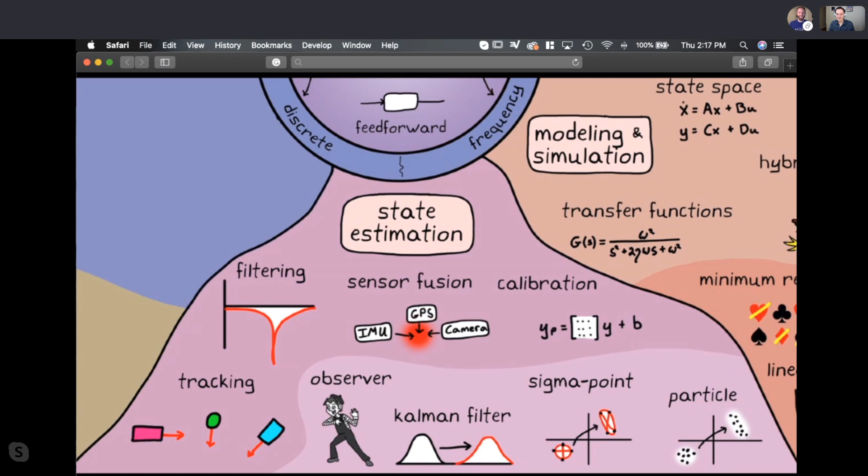All right, so now that gets us all the way over to the left half side with the control methods. And there's a few high-level things that I wanted to just kind of touch on, but keep in mind that every single time I look at this chart, I realize I've left something out or made some kind of mistake.

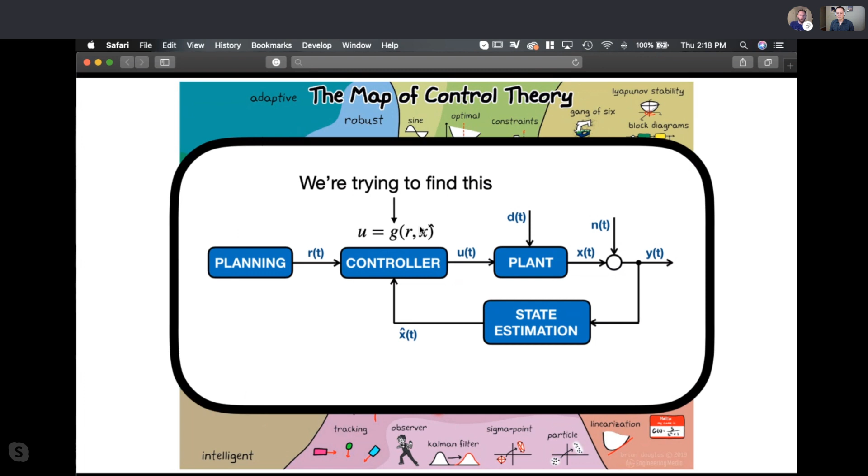So there's a few that I want to add already. But just as a reminder, what this whole left half side is doing for us is it's trying to figure out how to find this function, a function of the reference or the set point and the estimated state, X hat. That's what our controller is. That's what we're trying to do.

So, linear. I'm not going to spend too much time on this, but linear basically means that it behaves, it follows these two properties, homogeneity and superposition, this controller.

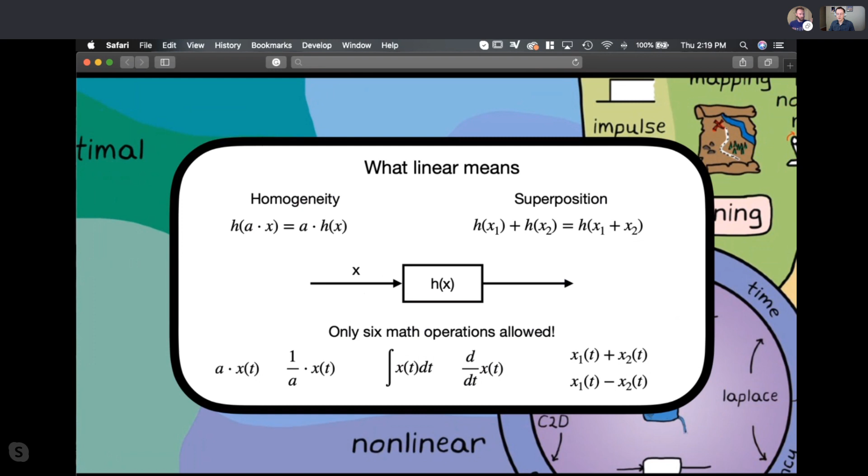And really the main takeaway here is that you're only allowed to use 6 mathematical operations. If you're going to design a system and it's going to be linear, like a linear controller, you can only multiply or divide the input, integrate or differentiate the input, or add and subtract inputs. You can't add constants, for example. That's no longer linear. So if you want to build a linear mapping or a linear controller, you get 6 operations, and you can combine these in any way you want, but pretty linearly.

And so, if you can operate within that linear region, awesome. And the reason why we want to do that is if we combine a linear controller with a linear approximation of our system, a linear model, man, we have so many easy ways to solve this. I mean, that's like why linear algebra is a thing. We can solve linear systems of equations really, really well.

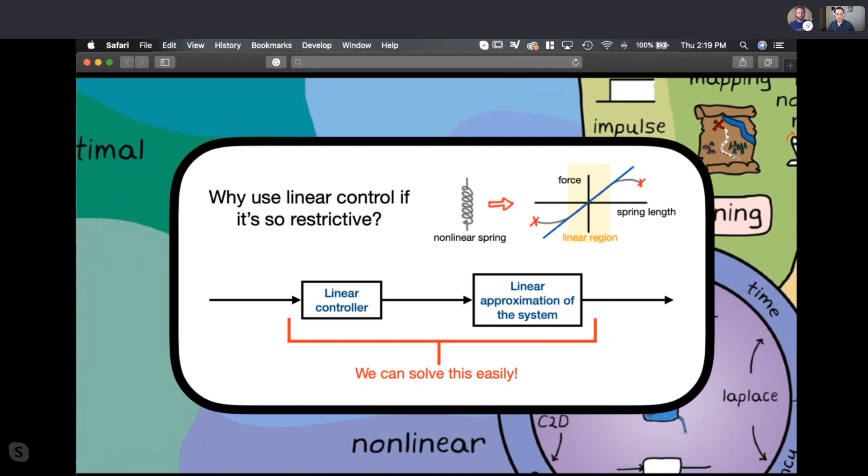So that's ideal. And some examples of this is PIDs, linear loop shaping, pole placement, anything really in the frequency domain is going to be a linear control system method. Full state feedback, which isn't on here, is linear.

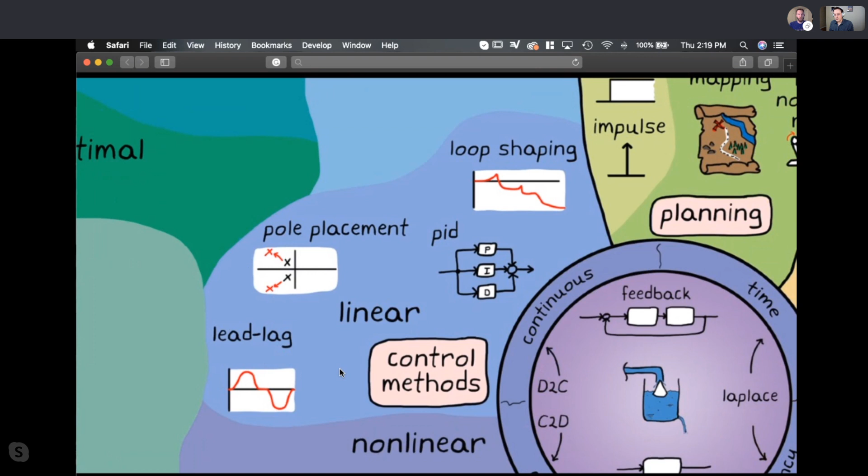And then its counterpart is nonlinear. Nonlinear, anything that's not linear. If you're using anything other than those 6 operations, it's nonlinear, right?

And typically, you're going to upgrade to a nonlinear controller when your linear controller just won't work. Your system is too nonlinear to be controlled by one linear controller.

And a couple examples of these is like gain scheduling, which is probably one of the more intuitive nonlinear controllers out there. Gain scheduling basically says, hey, I bet you a linear controller is going to work over this really small range in the state envelope. Like as long as I'm just at this temperature, a linear controller is going to work. If I get out of that temperature, it's no longer going to work.

But a new linear controller might work, and I can just switch between those two. And so what this is saying is build a whole bunch of linear controllers and then just switch between them, schedule them based on the situation.

If I can interject here, as just you can tell me if I'm wrong, but I think an example of this that might tie back to rocketry is if you're flying a liquid fueled rocket and your center of mass and your moment of inertia is always changing, you can schedule the gains to change as that changes. And so you know that a linear system is not going to represent, or a linear controller, just one, is not going to represent your control gains and how the vehicle can be controlled through the whole burn, the whole depletion of the fuel tank.

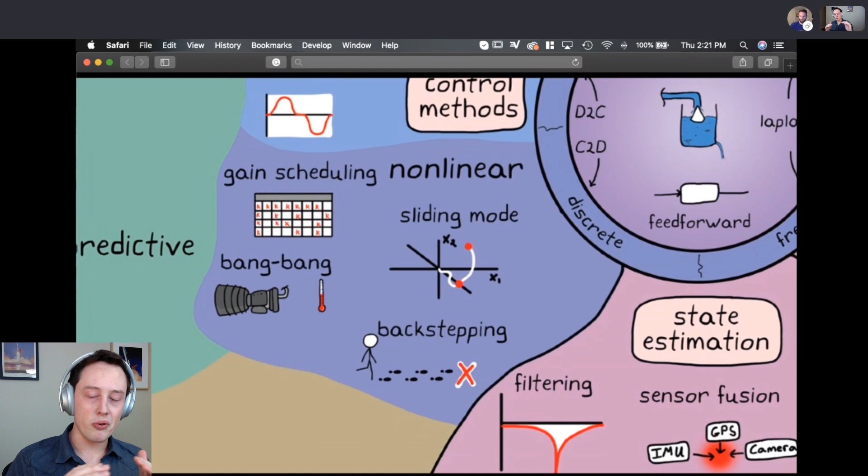But if you linearize around a bunch of points, part of this is how full the fuel is, and then this is how full, and then this is how full, if you linearize about those points, you can schedule those different gains and basically address the whole control problem by cutting it up into a bunch of different sections. Yep. Yeah, exactly.

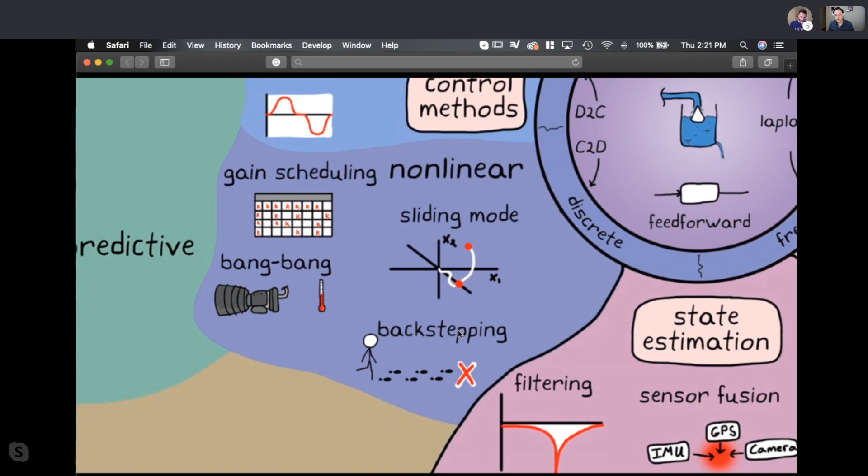Other examples like bang-bang control, which is off and on, sliding mode, and backstepping. I'm not going to get into these because I wanted to be done here hopefully by 2:30, so we have plenty of time to talk with folks.

Here's the important part: every single controller falls into one of those two categories, linear or nonlinear. That is a pure dichotomy. All of these other things we're going to go into overlap—sometimes they're linear, sometimes they're not. It can be robust and adaptive and optimal, all of these things. So don't think of these as hard, fast descriptions. Just think of these as terms that you may apply to your system as you're developing it, or at least understand what these terms mean.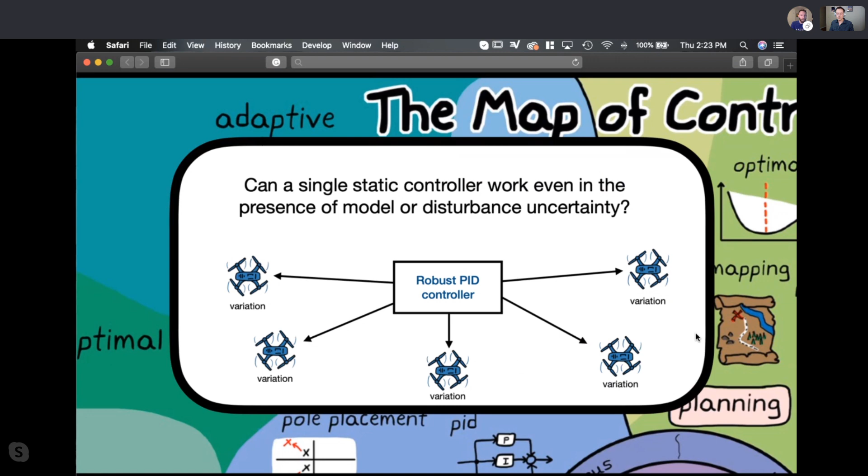So if somebody says robust control, this is the question they're trying to ask: can a single static controller work even in the presence of model or disturbance uncertainty? For example, your model is wrong—it's a linear model, it doesn't match reality. But if it's a robust controller, that means it can handle some amount of variation, some amount of uncertainty between the model and the real system before everything goes to pot. An example is if you're building a bunch of drones and you want a single PID controller, like you're building toys, and you want to put the exact same PID controller on every single one, but manufacturing defects and tolerances mean they're all slightly different. You would want to make sure your PID controller is robust to all of those variations. So that's the theory of robust control.

And there's a bunch of approaches: H infinity, which is probably the most popular approach, mu synthesis, Lyapunov-based control. Loop shaping is actually a linear robust control method. So again, overlap everywhere.

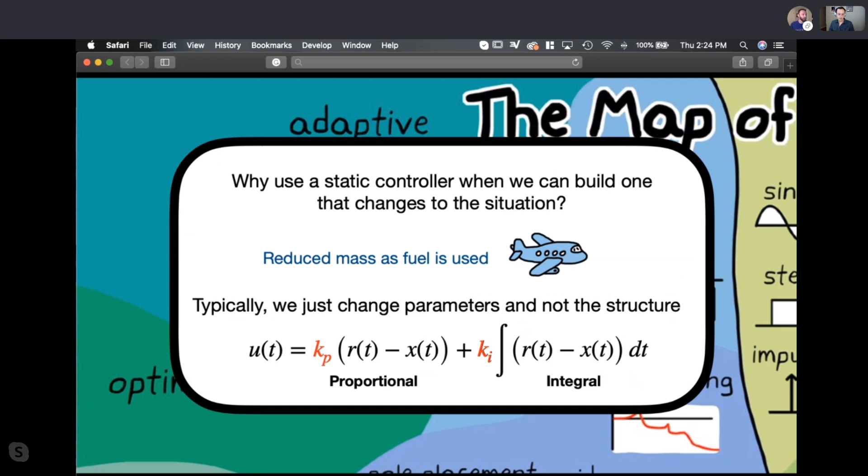Adaptive control asks the question: why are we using a static controller when we can just build one that changes to the situation? This gets back to what you were just talking about, Joe, with gain scheduling. You could gain schedule, or you could have an adaptive controller where the gains themselves are changing as the mass changes or the CG changes or something. It's a form of state estimation because you're trying to estimate the model as you go and then change the gains in real time.

Some adaptive control techniques are like extremum seeking or model reference adaptive control. I'm not going to go into too much detail on all this, or iterative learning control. You can look these up, but these are forms of adaptive control that change how the controller is responding in real time as we go along.

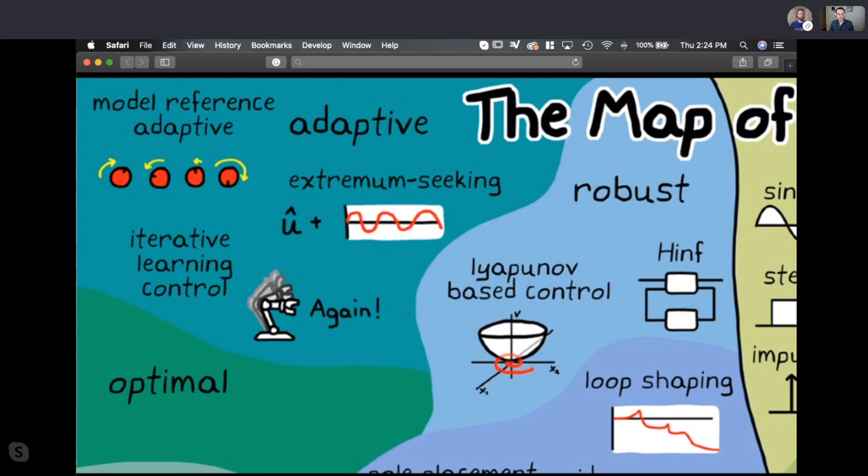We could choose some form of optimal control, and optimal control, this is going to pop up. I think this is killing my computer, by the way. Oh yeah, I'm sure, it is not happy at the moment. Its fan has been going nonstop.

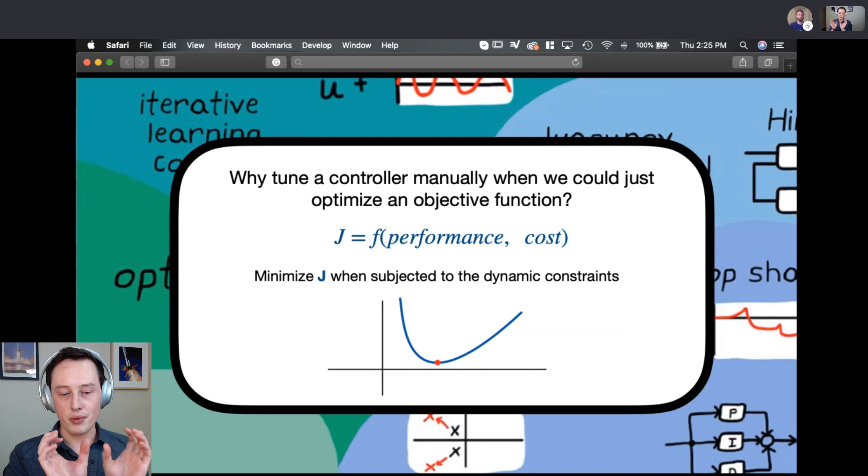Optimal control asks: why are we tuning a controller manually when we could just optimize an objective function? An objective function says, if I can write this function that balances or combines performance and cost, can I just find the perfect set of gains that minimize this function when subjected to the dynamics? That's what you're doing with LQR. Yeah, I set a cost—this is how important it is that you control this state, and this is the cost of using the actuator. You combine those two through the function, and it gives you the gain that's going to get you those results.

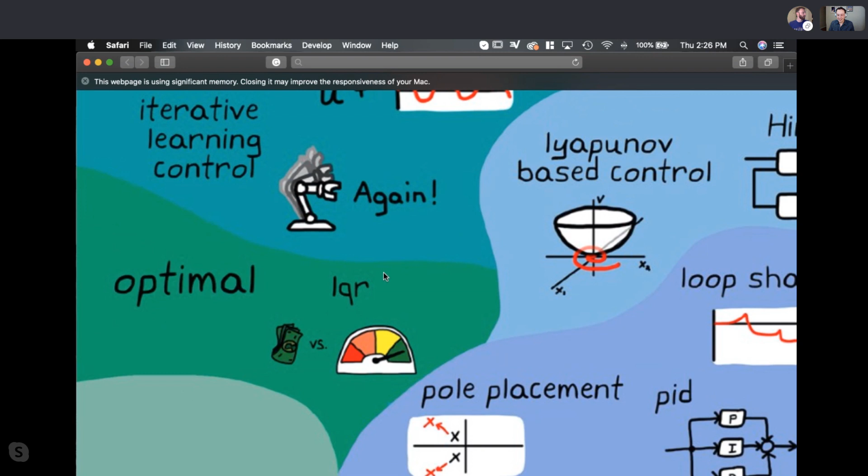Yeah, we may—uh oh, it's struggling. Oh no. Hey, there we go. Okay, LQR, it's a way of setting a quadratic cost function applied to a linear system so you can find the proper regulator gains. Yeah, LQR, linear quadratic regulator. This page is now... Safari's not happy. We're almost there, wait, there's like two more here. But I can hand wave the rest. Let's see, maybe command the next slide and then just start talking about it. See if it... yeah, we might be—I got an idea.

This is going to be less than ideal, but we're so close. We're just going to finish it. Oh, you'll just go from the image. Oh man, this isn't going to work. Oh well, it's fine. All right.

So now we're over here on the predictive control side of things, and predictive control just says, hey, if we have a model and we're able to predict the future, why don't we just run that model every time step, add some constraints into the system, build an objective function, and instead of optimizing once like you do with an LQR, why don't we optimize every single time step and rerun the model over and over again, making predictions into the future, and figure out what the best command should be by running this model. That's the basis behind model predictive control.

And there's a lot of different flavors of that. There's robust MPC, linear MPC, explicit MPC, and all of these different ways of running an optimizer and a model in real time on your system to predict forward into the future.

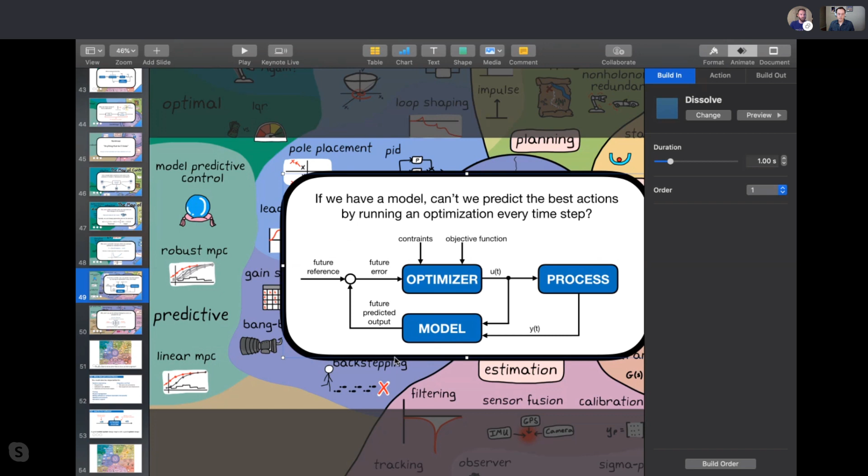And then there's this idea of intelligent control. Intelligent control says, hey, why don't we just let artificial intelligence solve our problem for us? Why are we mucking around with all of this knowledge? Let's just set it and forget it. There's a ton of problems with it, but it's very compelling.

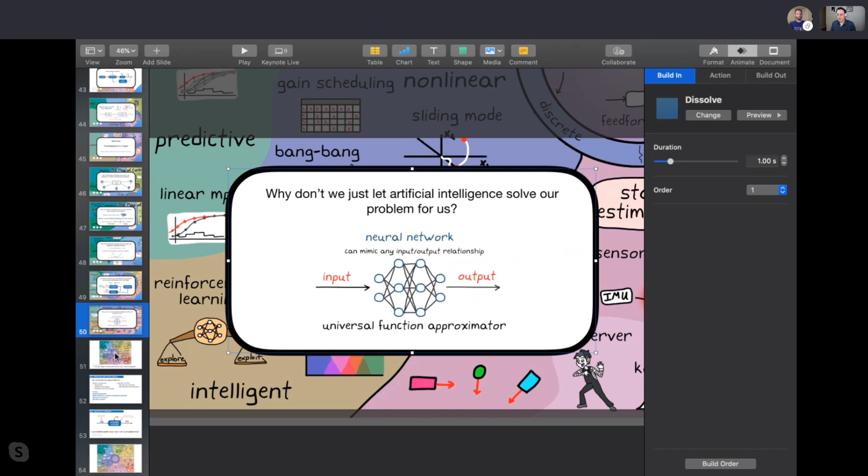So we've got that going for us. So this sort of answers the question right away here. But this is the thumbnail here, which is usually when I talk about this with folks, one of two things happens. They either panic because they think they need to know all of this stuff, or they are more impressed than they should be because they think I know all of this stuff.

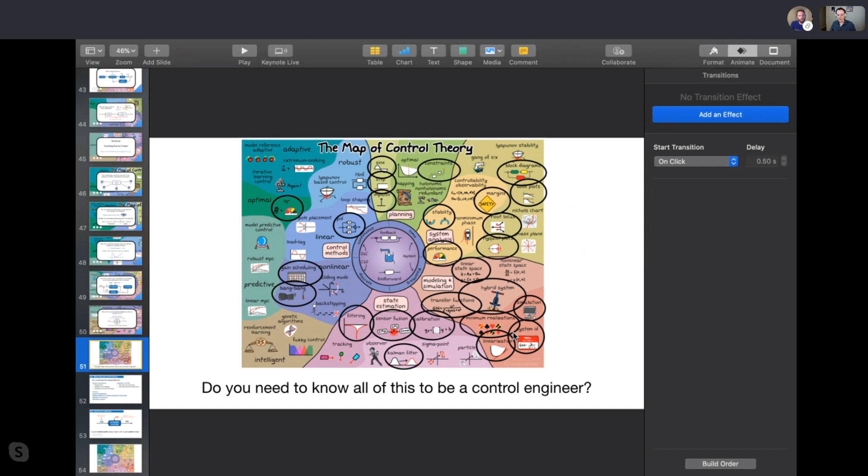And a lot of this I don't really know very well at all, is the bottom line. And I haven't had to know it because in my particular field, it hasn't been terribly important for me to learn it. So what I've done here is highlight, which you guys probably can barely see, let's get rid of this, that you guys can barely see here.

But these are the things that I've got a lot more experience with just in my day-to-day job of what I've done. It's heavy on modeling and simulation, heavy on state estimation, a little bit of planning, but I'm a space guy, and mapping, and we've gone to places where I haven't had to deal with a lot of this stuff. A little bit on stability and performance and things like that, but no controllability or observability. I've never worked on a non-minimum phase system. And on the control side, I've really done everything with these four: PID, LQR, gain scheduling, and bang-bang.

Just to go back, had to. Sorry to interrupt, but one thing that helped me a lot - we had a conversation a while ago - was you explaining that at least for controllability and observability, I was asking something about that a while ago, and you were like, yo, I've never seen anyone use that in the real world. There are so many of these things that over time you just develop an intuition for, that you're not always going to have to do every bit of math for it, or run a bunch of calculations to understand, is this going to work or is this not?

Right. Yeah, I want to clarify though. It's not that it's not important, because some people do run those, and it is important to them. It's just the systems I've worked on, I've never had to determine whether it was controllable or observable, because it was intuitively obvious. Like, for example, with Sprite, you could remove 2 of those thrust vanes and just have 2 in line with each other. You can do the mathematics and then solve for the controllability gramian, and then realize you can't control one axis. Yeah, you can absolutely do that, and it's going to come out and mathematically tell you that.

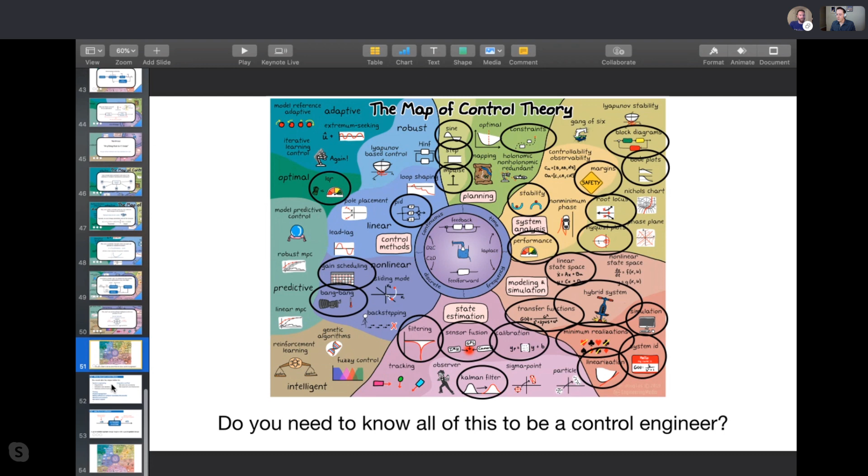I just wanted to let people know control engineering is way more than just control theory. There's systems engineering, integration and test, writing software, buying hardware, product management, and all that stuff. Everything that you're doing, Joe, is part of the whole process here. It's not just a bunch of theory, there's a lot of things that go into it.

And then the last thing here is just sort of a plea as a control engineer: you don't always have to solve things with feedback control. You don't always have to say this thing's total crap, but the control guys can fix it, or the software guys can fix it, or whatever. So I put here, good control system design begins with a good system design.

We had a conversation yesterday about how your IMU is off center, and so now every time it rotates, pure rotation looks like an acceleration. There's also some component there in your IMU. You can absolutely fix that in software. I know yours is a little hard because you have a ducted fan right in your CG, so you can't really put the IMU there. But in a different system, it may be worthwhile relocating the IMU, for example, rather than trying to struggle and figure out how to solve this problem after the fact.

I could spend a week and a half on the math and implementation for it, or I could just, at the beginning of the design phase, if I had the option, make some room here, put it at the CG, and essentially eliminate that problem down the line.